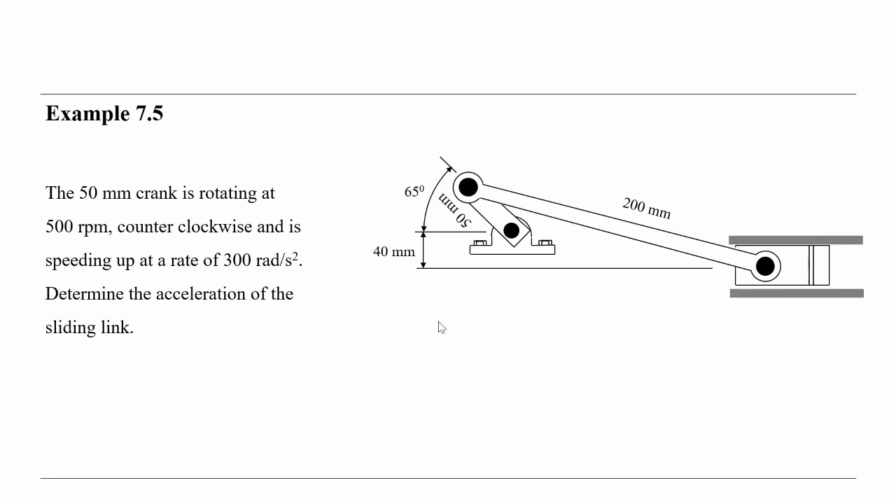Okay, so we discussed in our last lesson the acceleration for the crank slider mechanism, or slider crank mechanism. Now today we will discuss the acceleration for the general 4-bar mechanism.

As you remember, we discussed in our previous lessons the velocity, and we discussed the relative velocity. How can we calculate the relative velocity if we know VA, for example? Then we can calculate VB. VB is equal to VA plus VBA, V relative to A. So we think in the same direction to calculate the acceleration.

You see here the vector polygon for the acceleration, and how we can build or create such a vector polygon for the acceleration, and what type of acceleration we have for the mechanism, and for the 4-bar mechanism. So we will talk about the relative acceleration method, which dictates the creation of the vector polygons, and vector calculations can be used to analytically solve the problems.

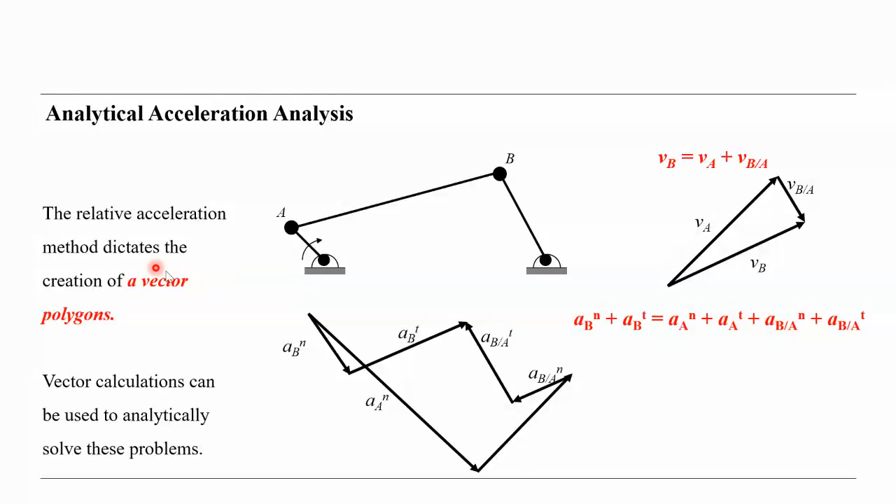So I have to write A0 here. This is A0, and this is B0 here. Let's write B here.

We know the motion of A0A, and there's only the normal component of the acceleration, and it is in the direction from A to A0. We draw a parallel from this, then to scale we can mark the magnitude of the normal component, regarding BA normal, BA tangent, B tangent and B normal.

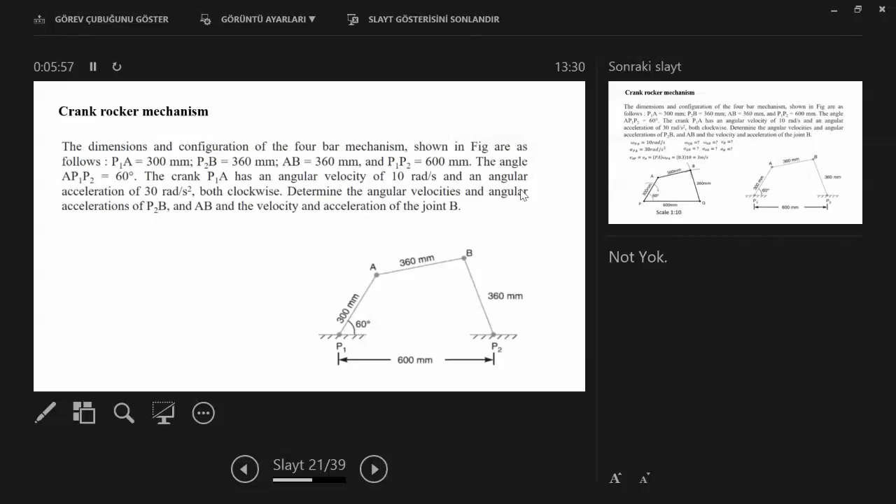The crank P1A has an angular velocity of 10 radians per second, and an angular acceleration of 30 radians per second squared, both clockwise. So determine the angular velocity and angular acceleration of P2B and AB, and the velocity and acceleration of joint B. Let's see what we have.

First of all, we have to draw the mechanism according to the givens. The givens are omega PA, the angular velocity, angular acceleration, and we are looking for omega QB, and omega AB, alpha AB, VB, and alpha B.

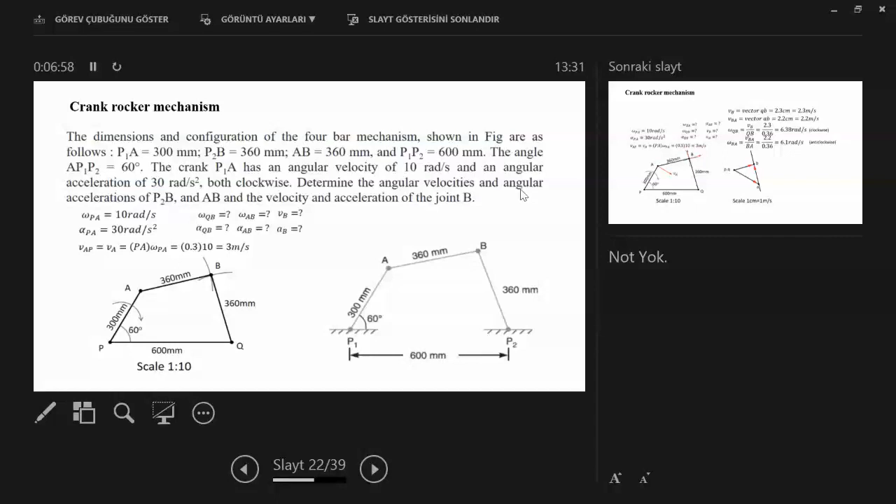So what can we do first? First of all, we have to calculate the velocity, because without velocity, we cannot calculate the acceleration. So the velocity is the first thing.

So we use a scale, 1 to 10, for the position of the mechanism, and we draw the mechanism. Then we know this acceleration and angular acceleration and the velocity of link A, or PA. So then we can calculate VBA.

Using the vector polygon, we know the velocity with PA, it is already given here. Because the angular velocity times its length gives us the velocity of the point, as a total velocity of point A, and this is the direction and the magnitude.

We can transfer here parallel to this point, so then we know the direction. We know the direction of the velocity of point B. It must be perpendicular to that, so therefore it is perpendicular.

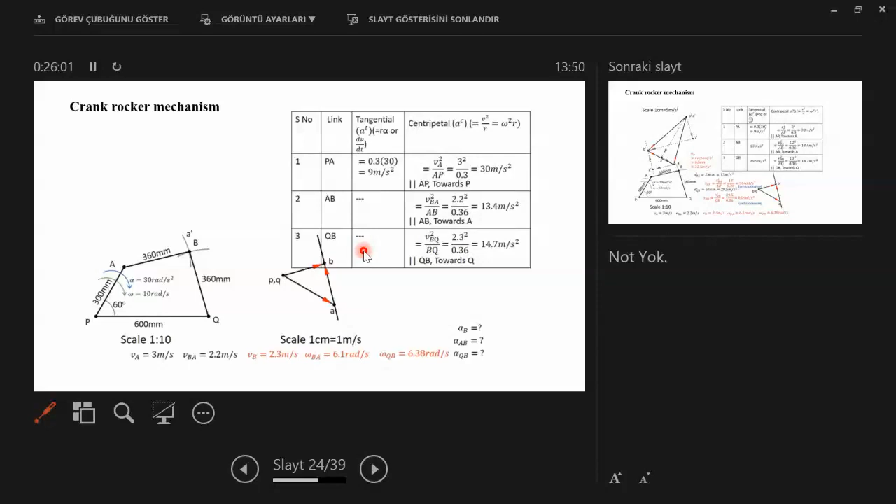But for links 2 and 3, using the velocity values we calculated before, we can calculate the normal components of the acceleration, but we cannot calculate the magnitude of the tangential acceleration for links 2 and 3. We know only the directions, and therefore we need the vector polygon by drawing to find out. All right, I get it. Thank you, Professor.

So this is, very graphically, how we can calculate the velocity for a general mechanism. As I mentioned, this is one method, one of some of the methods. The other one is the analytical way, the algebraic way. I will show you, and in the book I give the name, all these equations you can find there.

There are also other possibilities. If you calculate the coordinates - you learn this in the dynamics part - if you can calculate the coordinates of this point, that means xb and yb, the first time derivative is the velocity, and the second time derivative is the acceleration. It's also one way.

But if you design something using design software like Inventor or SolidWorks and so on, it is also very easy to draft such a polygon and find out the values. Repeat that, I didn't understand. What do you mean? I mean, if you make a design using design software like SolidWorks or Inventor, you can using the graphic facilities easily calculate for a certain position of the mechanism.

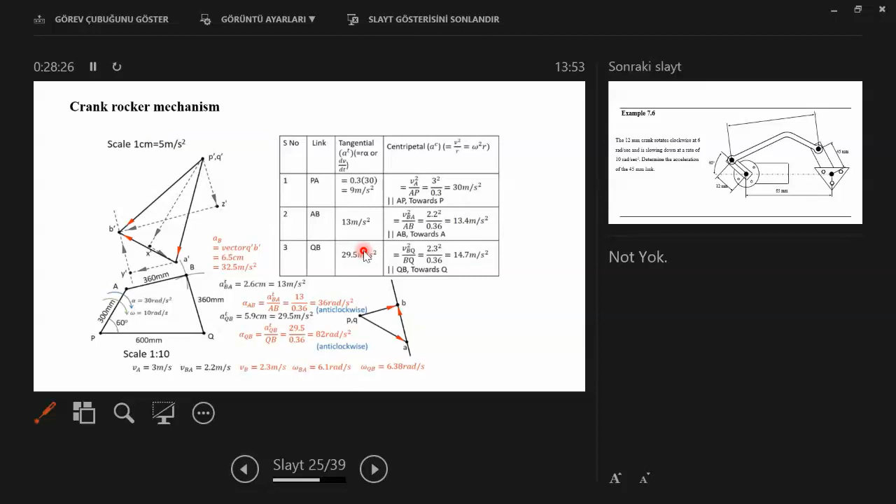You can calculate the velocity and acceleration, and to define a scale and to calculate it is very easy if you use such a software. The facilities given by the software are actually fascinating today. So, this is another homework - you have to work on that.

So then let's... you didn't do it? This is homework 7.6.

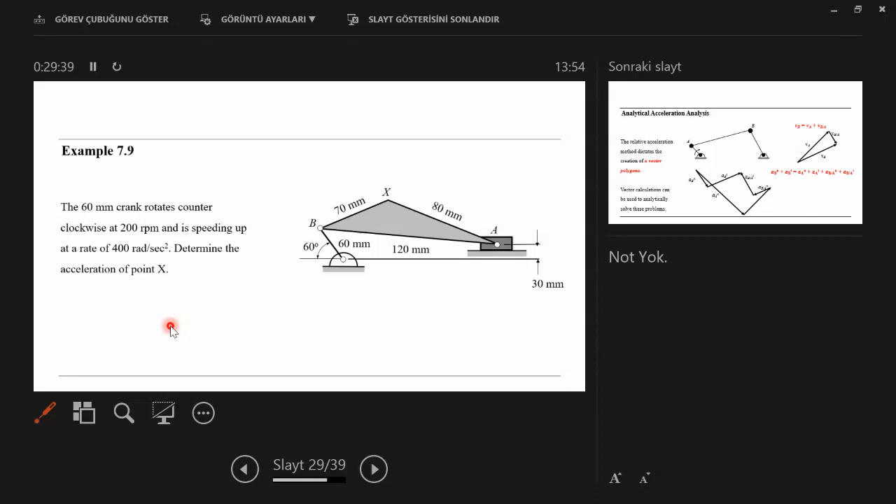Yes, I want to see it. Send it, okay. When is the deadline for the homework? Before the final exam.

Can you show the question again, please, just to take a photo of it? 7.6, okay, this one. Yes, just a moment. This length is not shown here. Sorry.

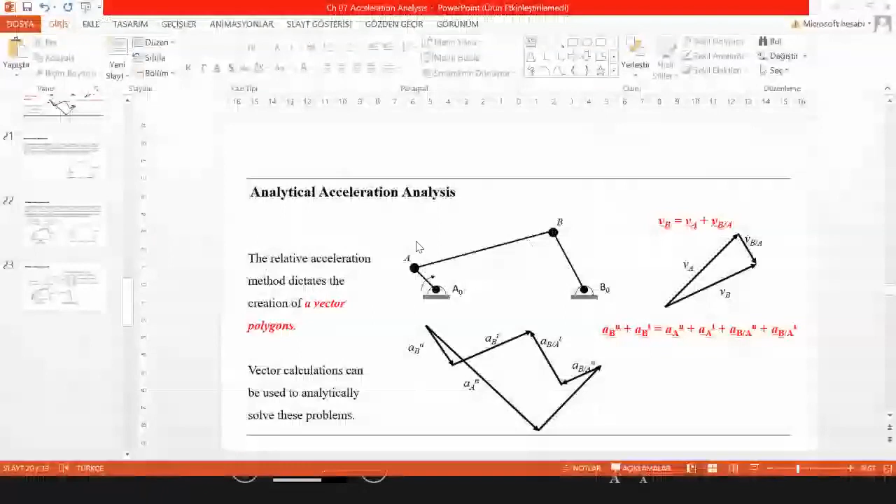So let's see, 250, it could be 250. Let's look.

Professor, is it possible to have all the homework questions in one PDF, like the previous homework? Because we have many questions in different recordings and it's hard to catch them up. You mean make one PDF with all homework questions? I did it at the beginning, but this is the last homework. This is the only homework, it's not more. But wasn't there another question from the previous lecture? I think there was another one. It's already finished, I will not go back again.

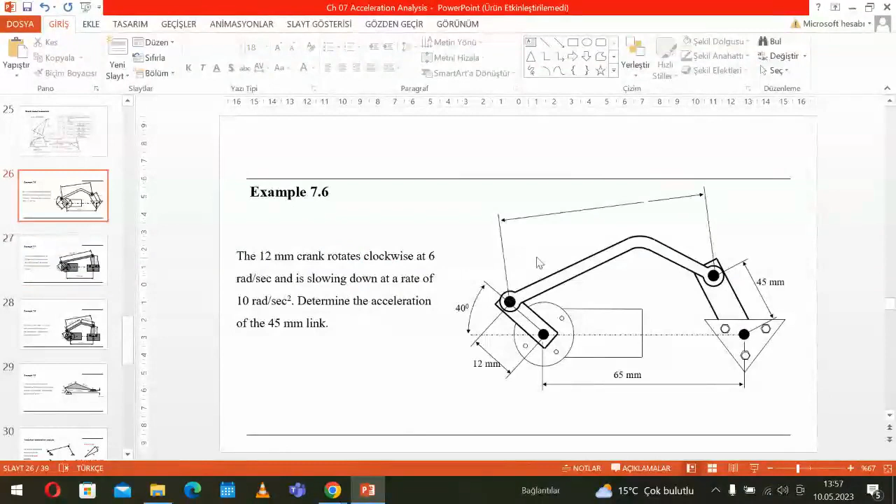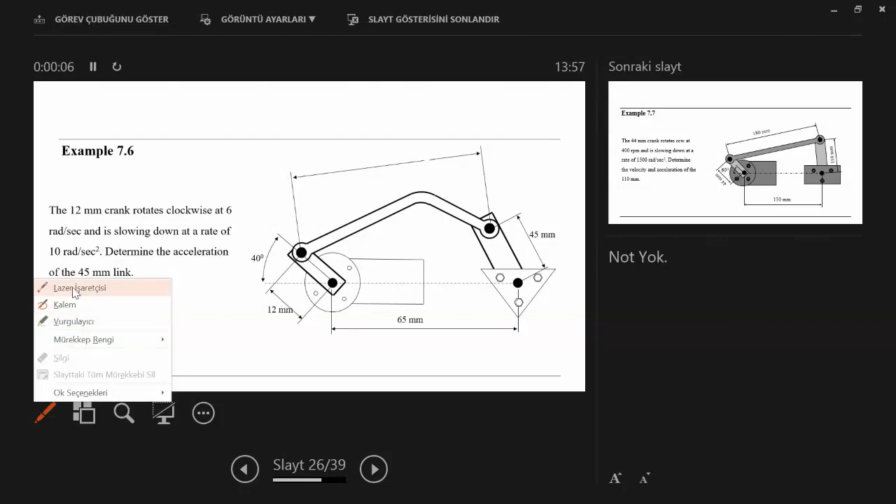Please do this homework, not that one, because the length is not defined here. I will check it. This one, you have all the dimensions. The crank rotates counterclockwise at 400 and is slowing down at a certain rate. Determine the velocity and the acceleration of the link.

Okay, so... before the final exam, yes.

Professor, can we bring the answer sheet, like a formula sheet, to the final exam? Send it by email, no, for the final exam, can we bring a formula sheet? Not a formula sheet, there's not too much formula. This is very simple, it's like kinematics, not machine design, not like the other lessons. Even mechatronics components? What do you want to bring from mechatronic components?

You didn't read it? No, I just remember it. No.

But there are equations for the crank slider and the crank rocker, big and long equations, how are we going to memorize those? The equation, the analytic way - okay, you can have some equations there, handwritten. I allow the equations, you can bring the equations, but handwritten, and no solutions. If I see any solution, I will stop your exam, all of them.

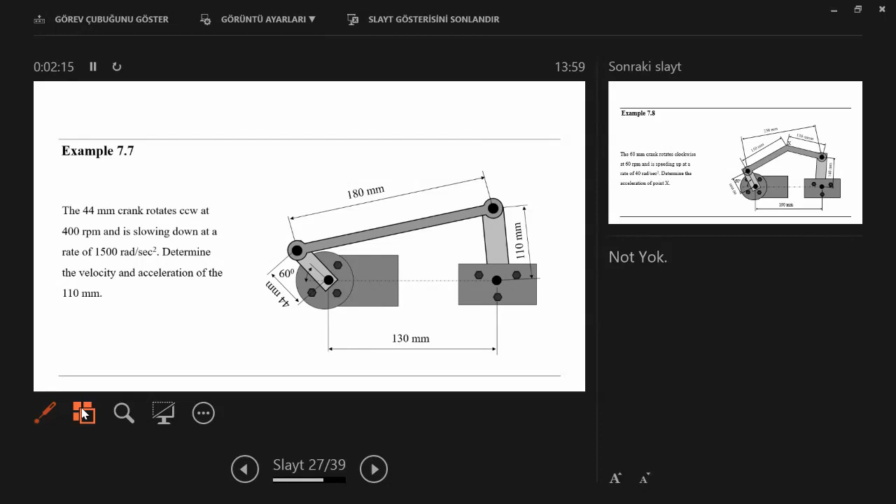But you must also know how you can calculate the acceleration and velocity using the graphical method. So how can we make the graphical method by hand, without a system, without a computer?

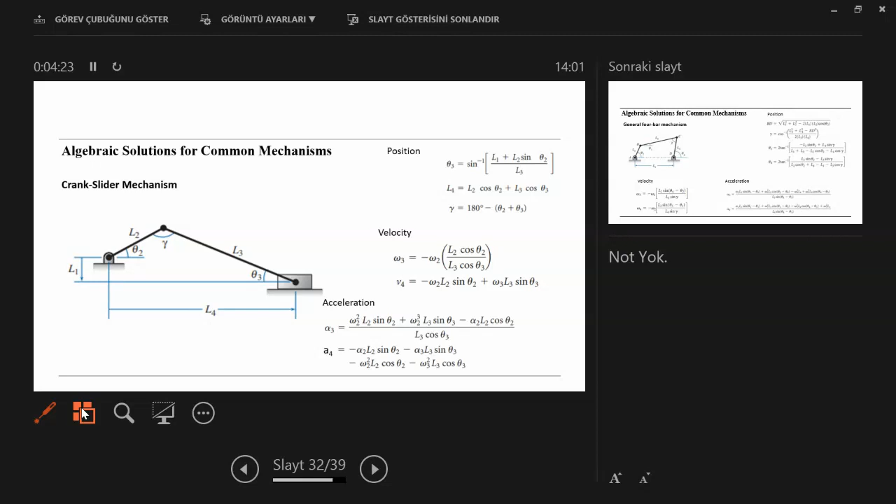And the second famous mechanism is our general four-bar mechanism, and also the algebraic solution for acceleration. I have here, and in your book some of them exist. I will calculate the position, velocity, and acceleration. Position, first time derivative is velocity, second time derivative is acceleration.

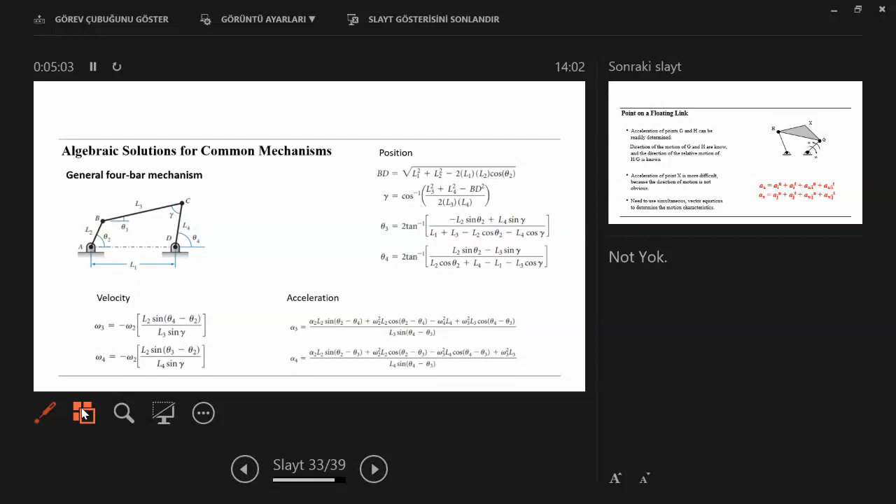Okay, so then a point on floating link. It could happen, in applications, that you should calculate the velocity or acceleration of any point on the coupler.

Because you know the coupler is the most difficult part in a four-bar mechanism. The coupler undergoes planar motion, that means translation and rotation together. But the crank, let's say this one, is rotating in simple motion, and this one is also simple motion - a circular motion about this point, and the motion of D is also circular about this point here. But the coupler is different.

So therefore, for any point on the coupler, how can we calculate the velocity and acceleration? This is the general equations we know from the relative acceleration or velocity method.

And we can also, if we know the velocity, I will get the acceleration. AX is equal, if you calculate AX, and if we know AE normal plus AH normal plus AH tangential plus AX relative to H normal plus AX relative to H tangential. So one of them you have to know, and the other you can calculate using the relative motion equations.

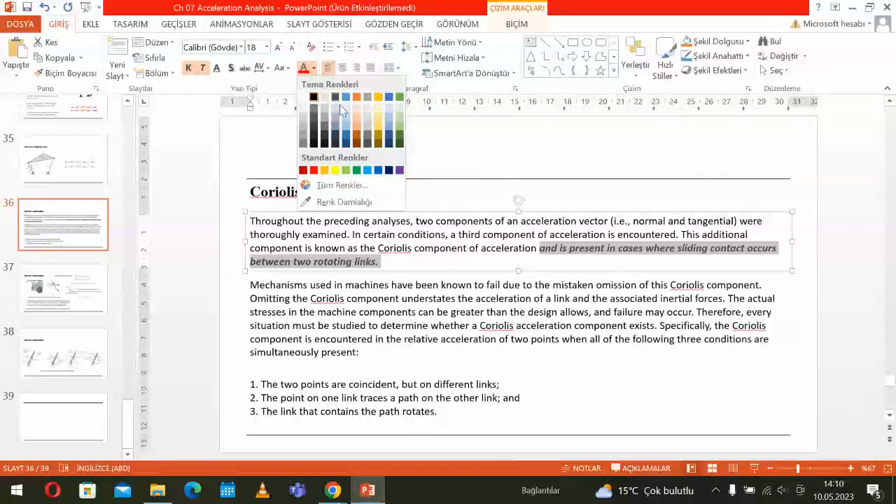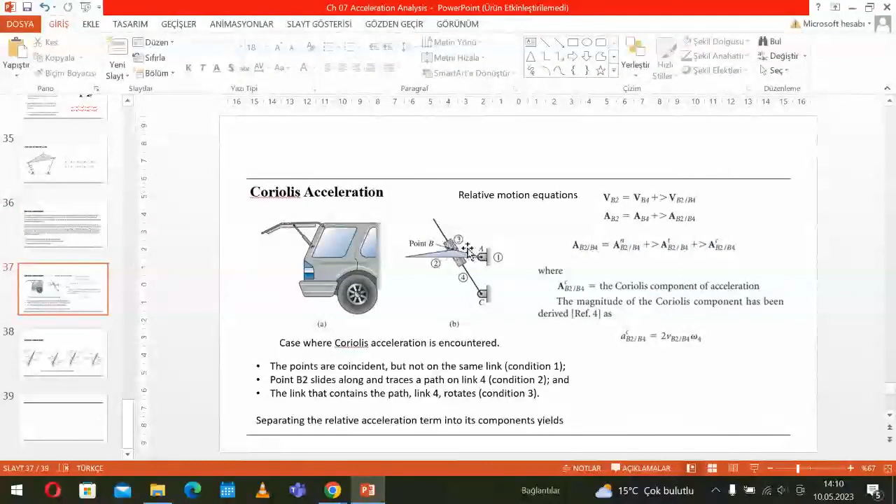examined, examined, mistaken omission,

Hojam, I'm sorry to interrupt you, but can I ask you a question?

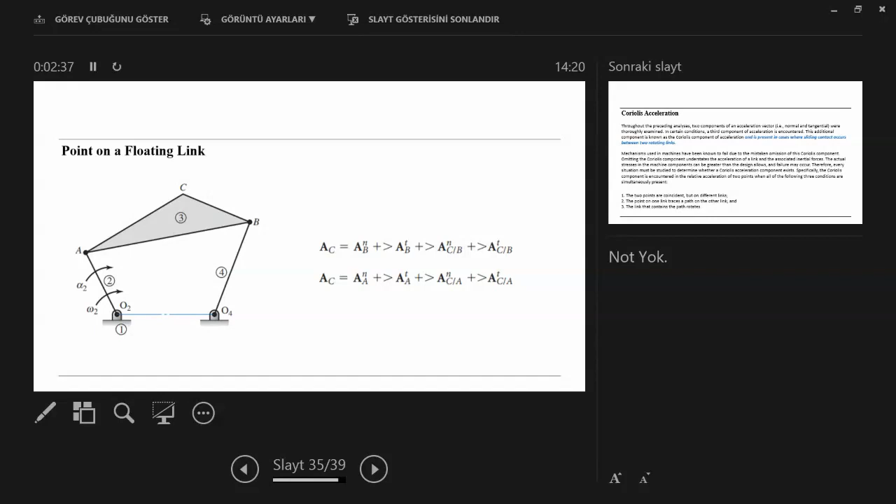So we can start, huh? The next part of this lesson regards the acceleration, the Coriolis acceleration.

Coriolis acceleration has been invented later, quite later. Technical calculations regarding acceleration made certain mistakes before, because scientists didn't know about Coriolis acceleration. Some scientist, I guess from France, invented this part of the acceleration and tried to predict it.

So, Coriolis acceleration is present in a case when sliding contact occurs between two rotating links. Let's say we have two rotating parts, one rotating here, the other one rotating here, and they have a sliding.

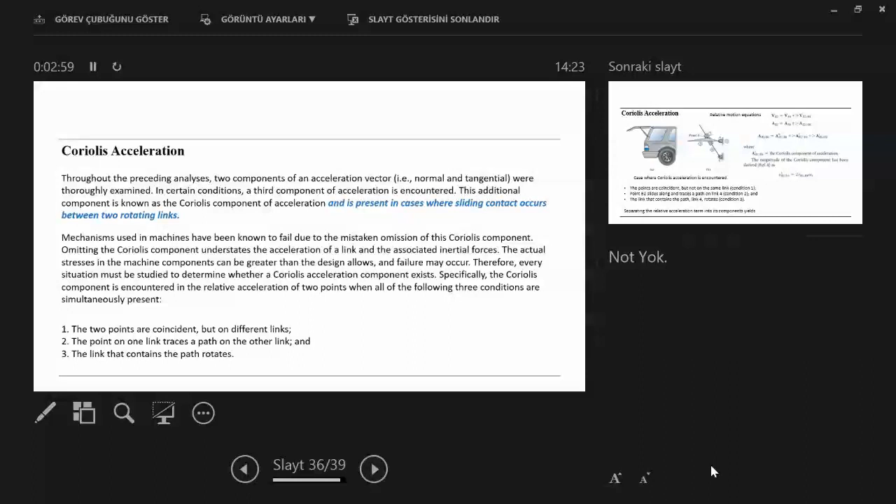And the points on one link create a path on the other link, and the link that contains the path rotates. There's a nice example for that from a car - each car has a door, and the opening and closing of the door has such a mechanism.

And this is like this actually. In this case, we have Coriolis acceleration.

From the relative velocity equations and relative acceleration equations, we get the Coriolis acceleration, B2 to B4, times omega 4. Omega 4 is the angular acceleration, angular velocity of link 4. So we can calculate exactly.

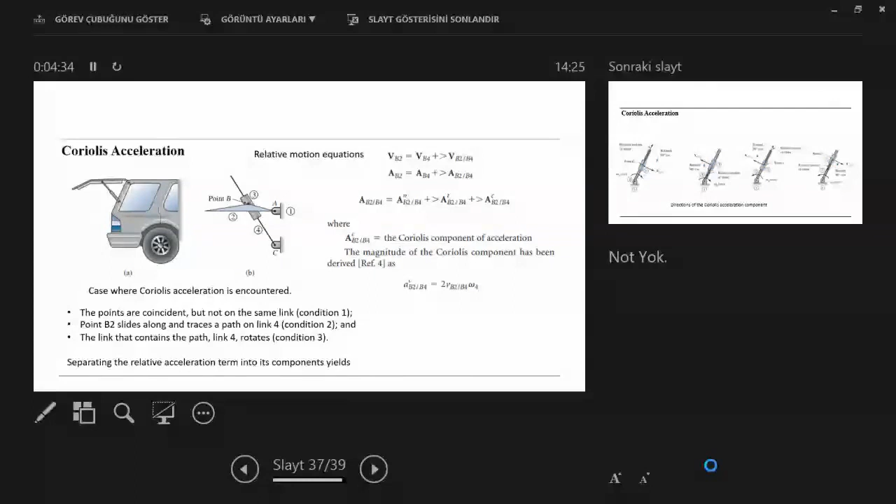This is the equation, so the points are coincident but not on the same link. Point B2 slides along and traces a path on link 4, and the link that contains the path, link 4, rotates. Separating the relative acceleration terms into its components yields this, as we can see in this example.

We will not make an example here, but there is an example you can work on. If you cannot calculate the acceleration correctly, that means you are also not able to calculate the forces coming from the acceleration, the inertia forces.

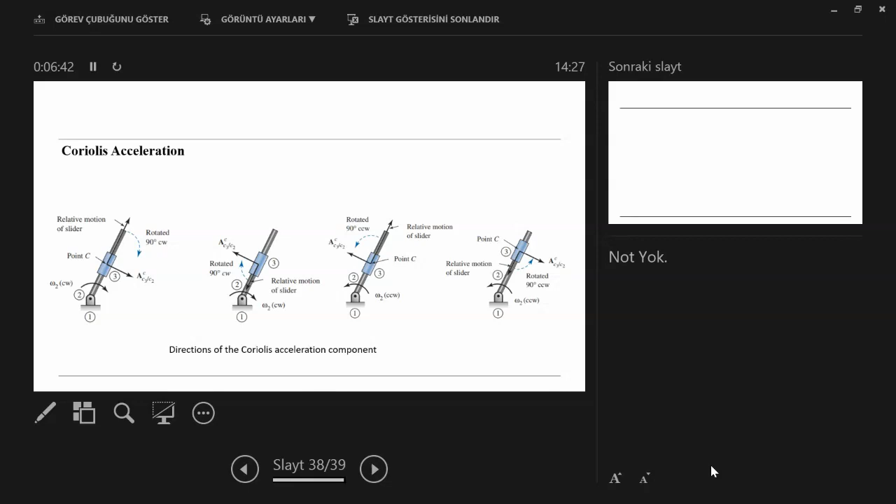Okay, so we finished the part on acceleration. Now, the cam mechanism.

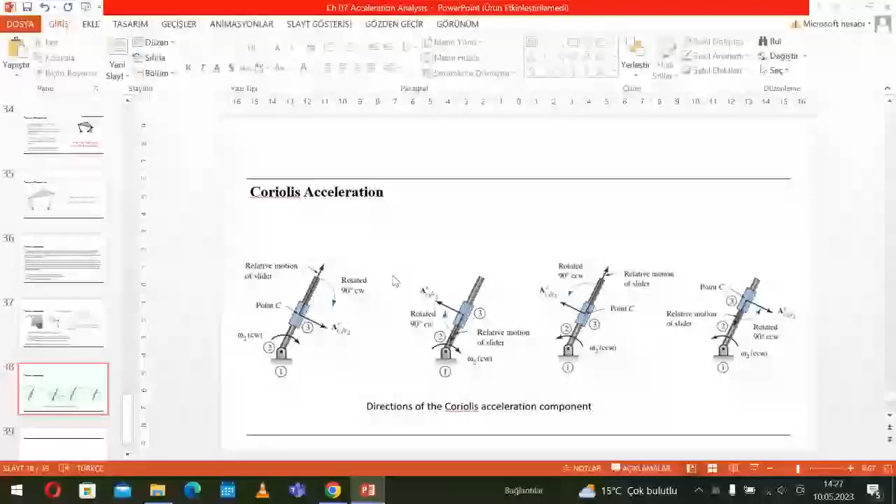So the cam mechanism was shown here. Let's see whether we can find it.

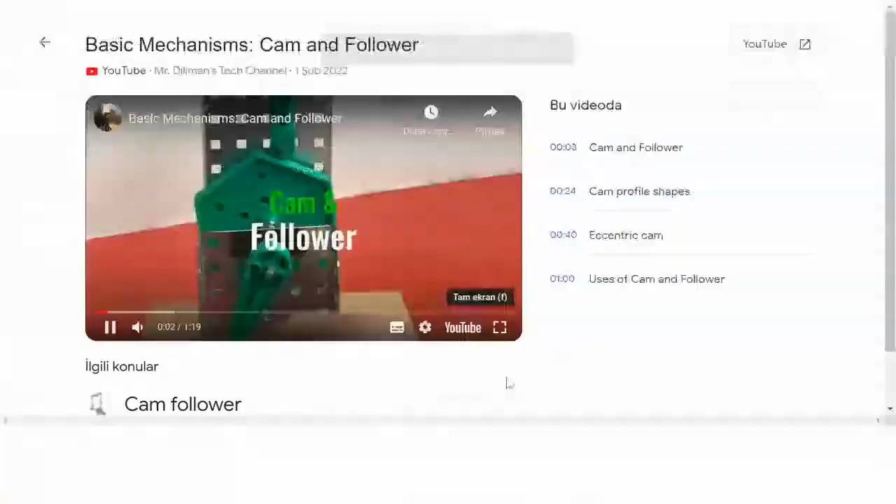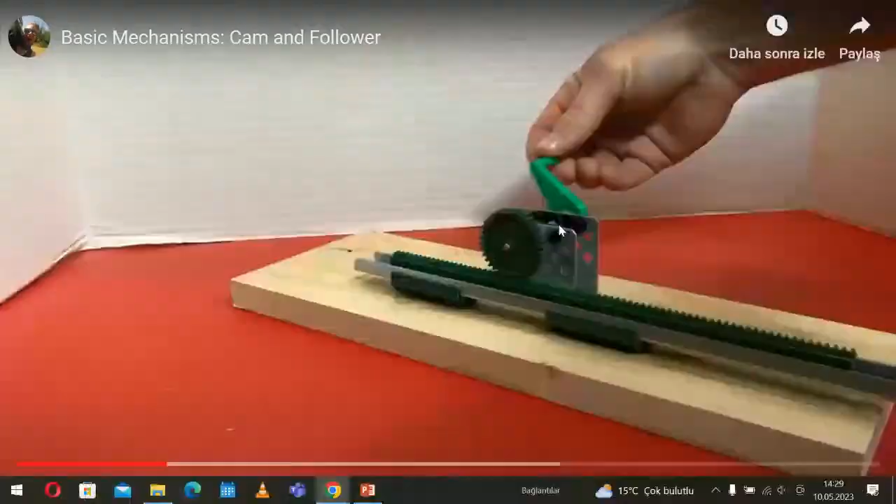A cam and follower is a mechanism used to turn rotary motion into reciprocating or back and forth motion. Reciprocating motion is different from linear motion because in a linear mechanism, you would have to reverse the direction of the input to get a different direction of travel at the output, while a reciprocating action goes back and forth while the input turns continuously.

A cam is a wheel with an offset center. Cams can have different profile shapes that produce different motion paths in the follower. A snail cam produces a slow rise and a sharp drop. This kind of cam is not reversible in its direction.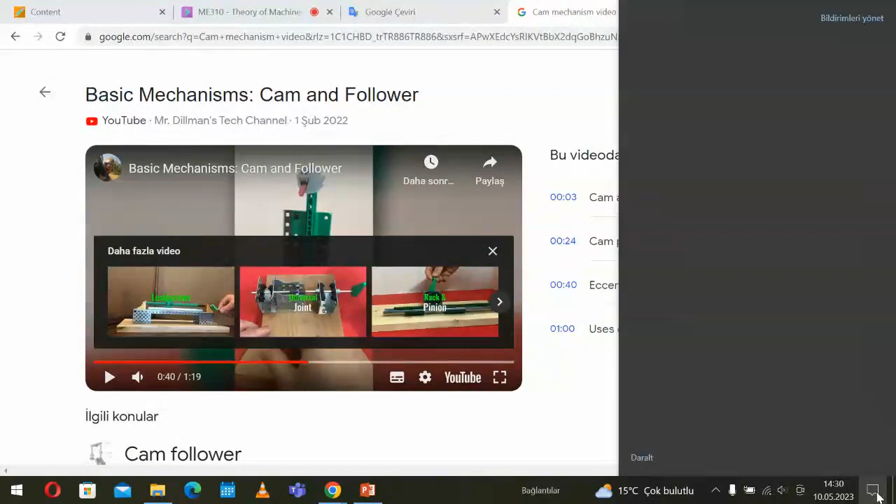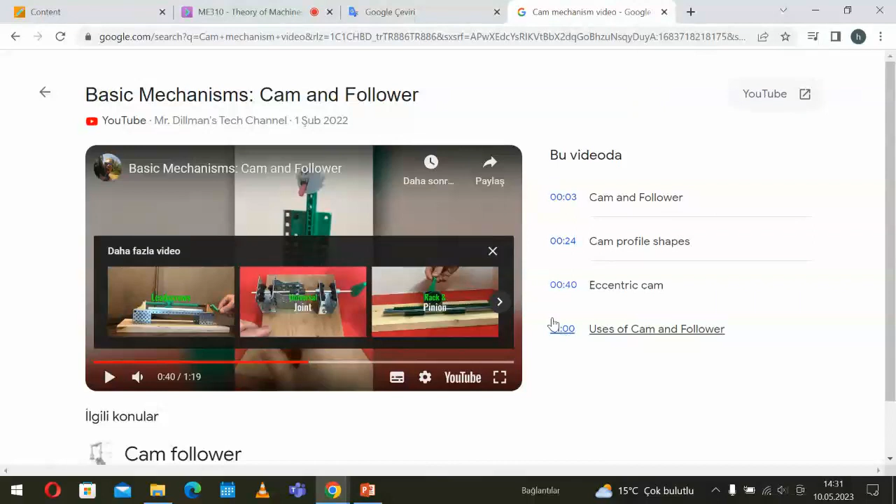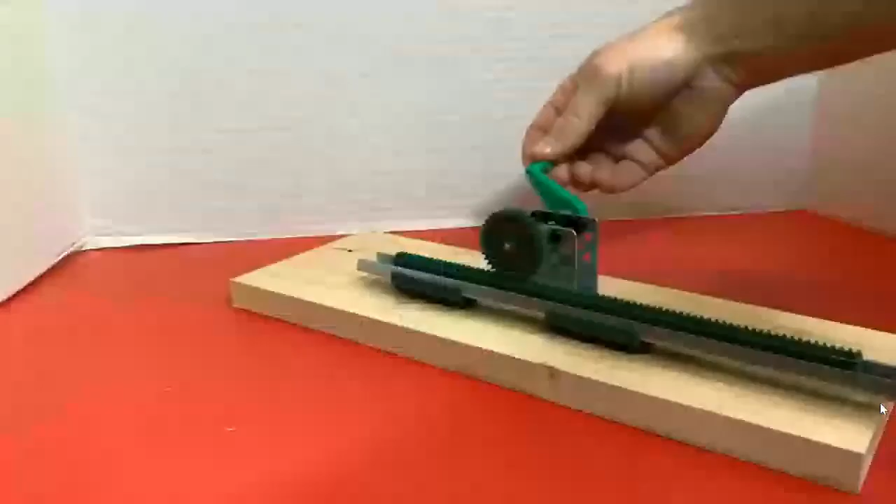A cam and follower is a mechanism used to turn rotary motion into reciprocating or back and forth motion. Reciprocating motion is different from linear motion because in a linear mechanism, you would have to reverse the direction of the input to get a different direction of travel at the output, while a reciprocating action goes back and forth while the input turns continuously.

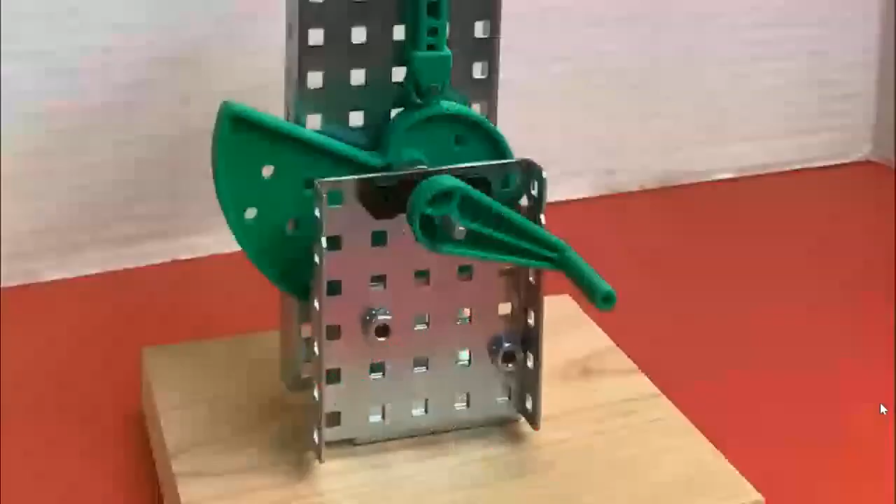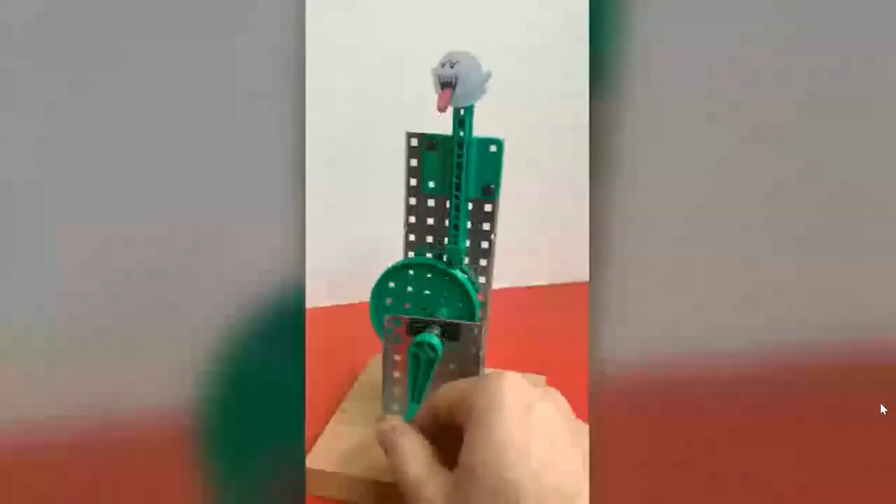A cam is a wheel with an offset center. Cams can have different profile shapes that produce different motion paths in the follower. A snail cam produces a slow rise and a sharp drop, and this kind of cam is not reversible in its direction. An eccentric cam produces a steady rise and fall in the output, like a sine wave. A pear cam produces a quick momentary rise and fall followed by a mostly stationary follower.

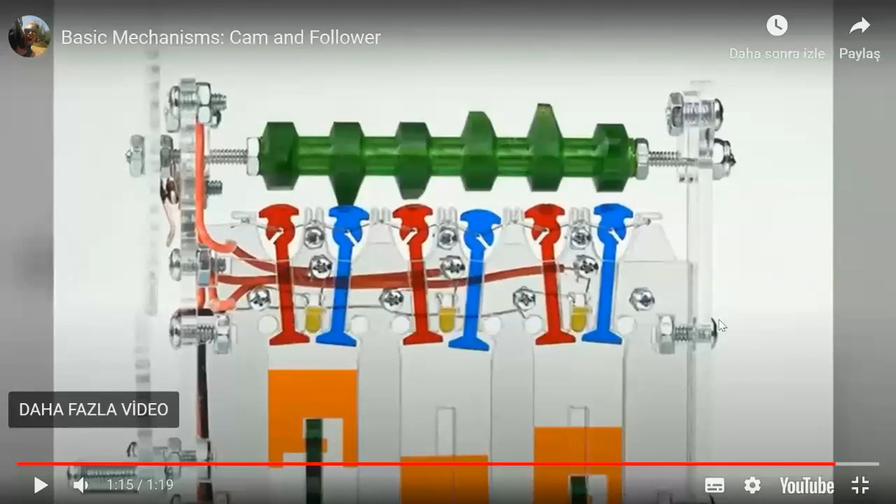So, in an internal combustion engine, we have a CAM mechanism to operate the valves, inlet and outlet valves. We use a CAM mechanism. So the CAM mechanism is also an important mechanism used in mechanical engineering.

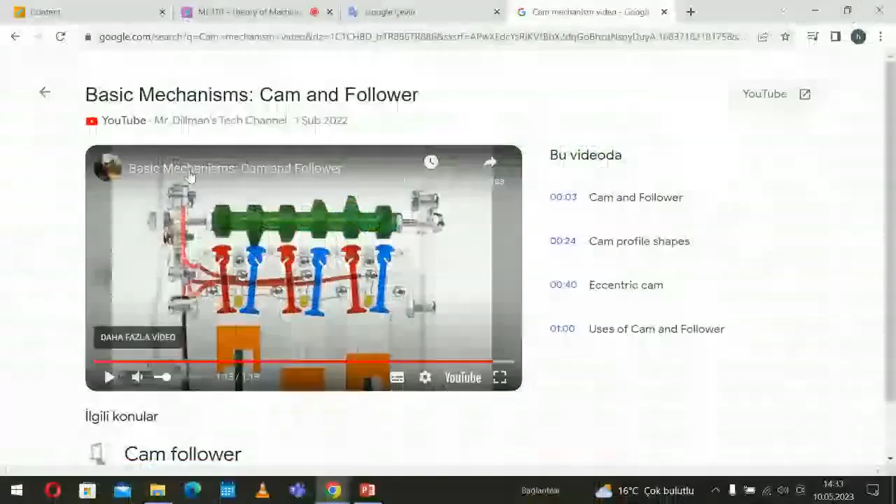So that I can show more, maybe here. Let's explain cam and follower. We know that in any engine, fuel is injected into the piston and combustion products are exhausted out from the piston by using valves. These valves are opened and closed with the help of a kinematic pair, cam and follower. The cam and follower are always in point or line contact with each other.

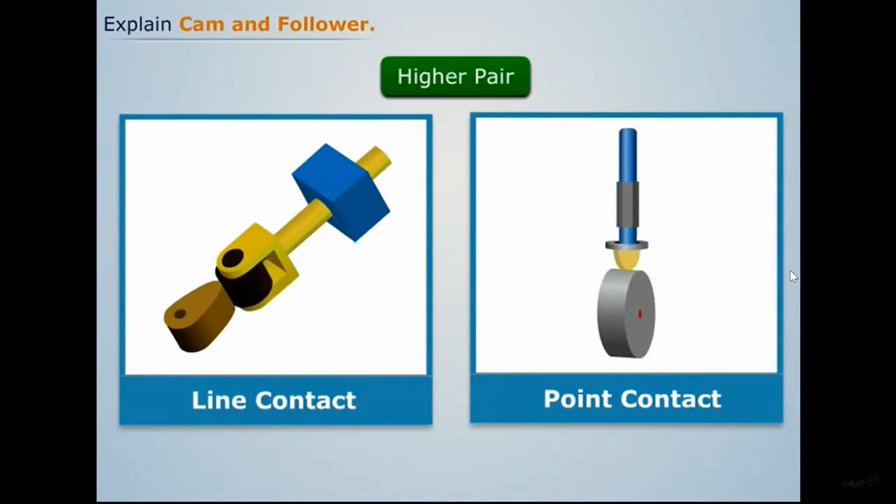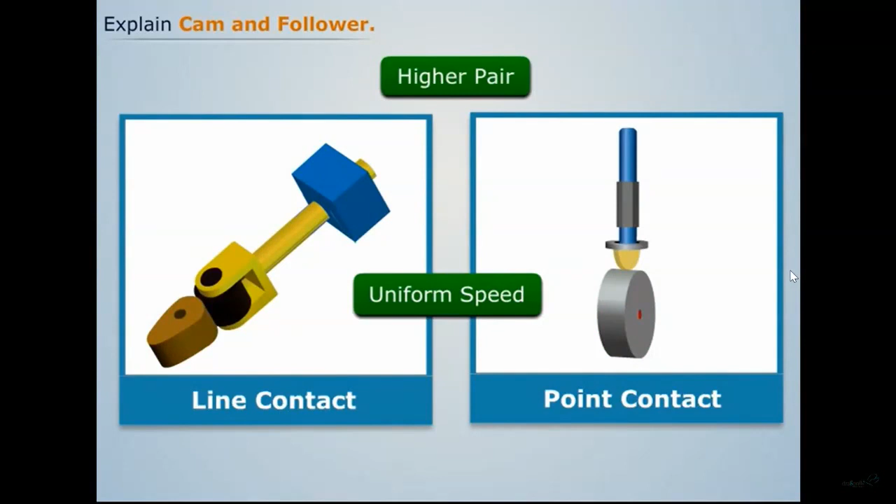So this kinematic pair is a higher pair. Cams are rotated at a uniform speed by a shaft, while motion of the follower is determined by the shape of the cam. Similar cam and follower pairs are used in sewing machines, feed mechanism of automatic lathes, etc.

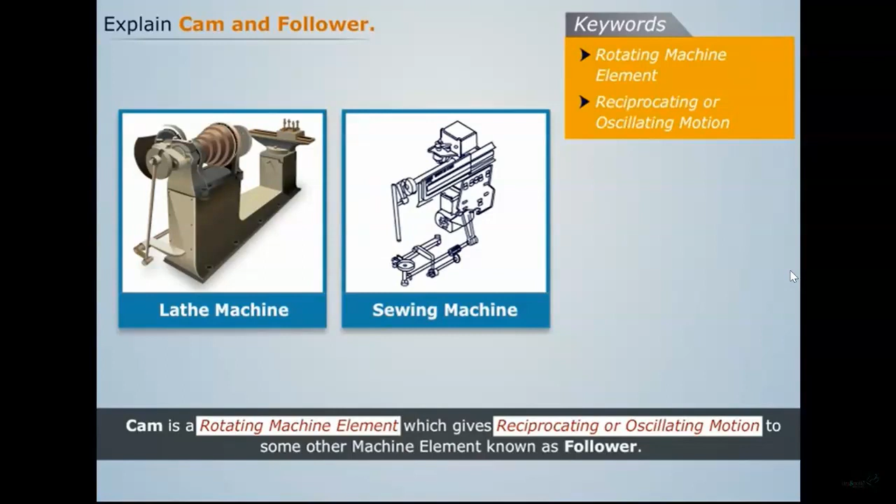Thus, cam is a rotating machine element which gives reciprocating or oscillating motion to some other machine element known as a follower. Cams can be broadly classified into two types: radial cams and cylindrical cams.

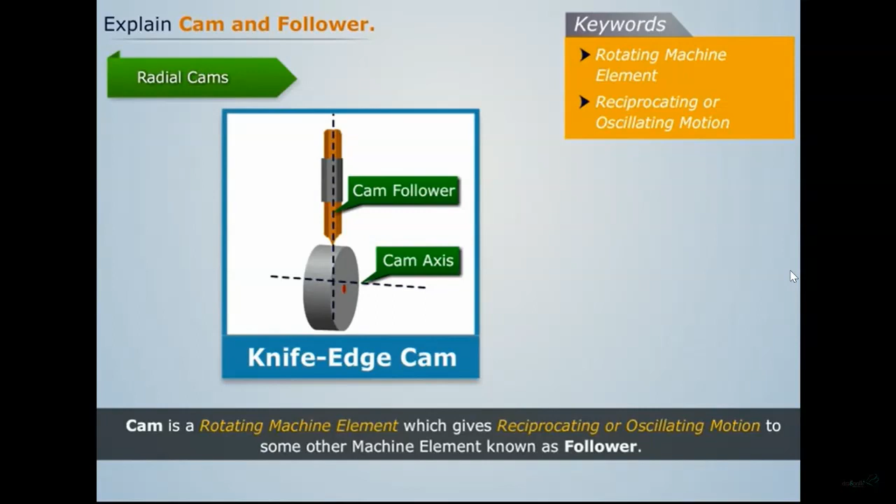In radial cams, the follower reciprocates or oscillates in a direction perpendicular to the cam axis, whereas in cylindrical cams, the follower reciprocates or oscillates about a groove in its cylindrical body in a direction parallel to the cam axis. Followers can be classified on the basis of three parameters: surface in contact, motion of the follower, and path of motion of the follower.

Based on the surface in contact, followers can be classified as knife edge follower, roller follower, flat-faced follower, and spherical face follower.

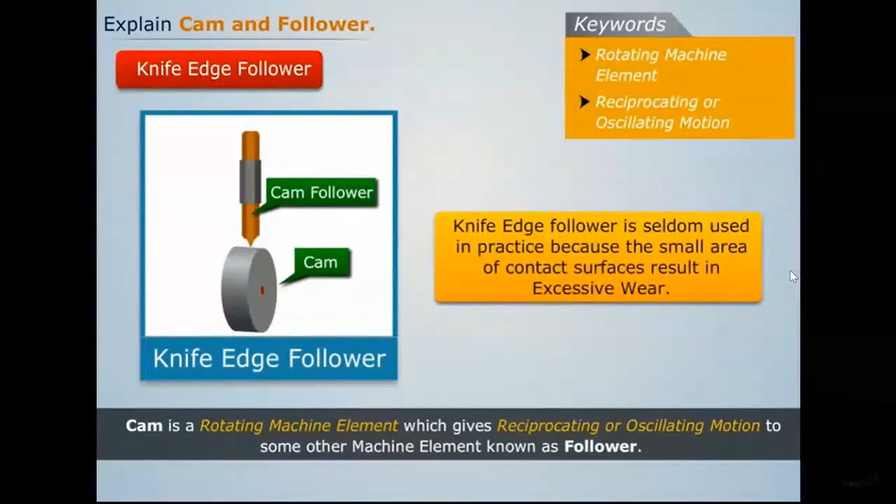When the contact end of the follower has a sharp knife edge, it is called a knife edge follower. It is seldom used in practice because the small area of contact surfaces results in excessive wear.

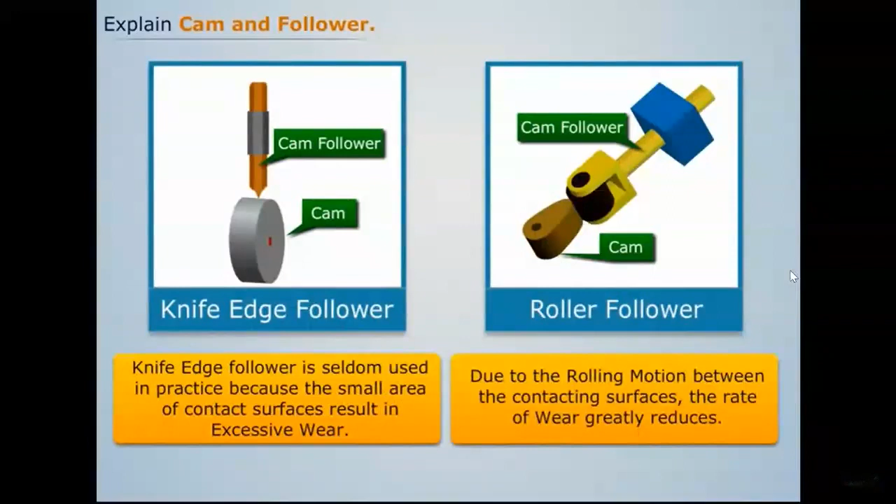When the contact end of the follower is a roller, it is called a roller follower. Here, due to the rolling motion between the contacting surfaces, the rate of wear greatly reduces. This type of follower is extensively used in oil and gas engines and aircraft engines.

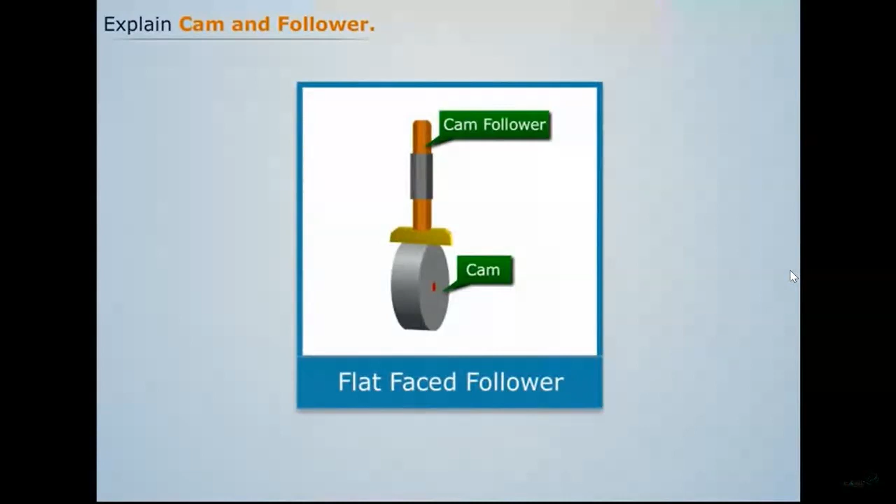When the contact end of the follower is a perfectly flat face, it is called a flat-faced follower. This type of follower is generally used in automobile engines.

When the contact end of the follower is spherical in shape, it is called a spherical-faced follower. This type of follower is used in automobile engines.

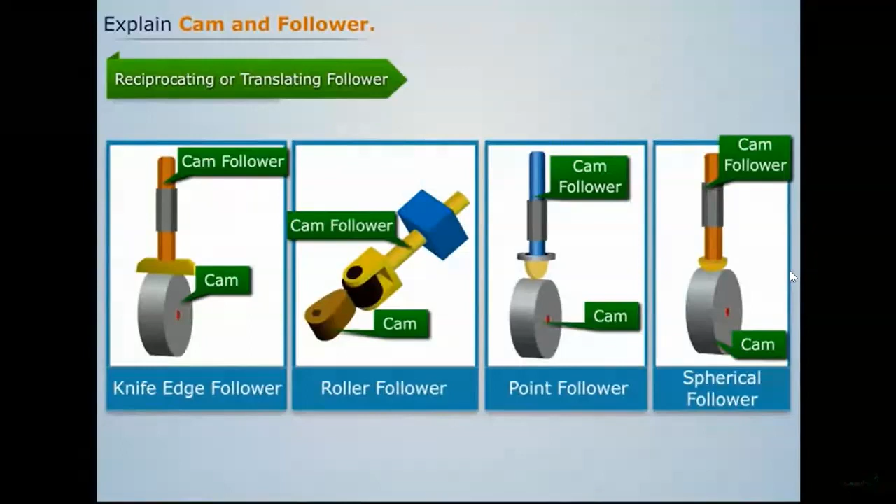Followers can also be classified based on the type of motion. When the follower reciprocates or translates in the guides due to uniform rotary motion of the cam, it is called a reciprocating or translating follower. When the follower oscillates in a predetermined direction due to the uniform rotary motion of the cam, it is called an oscillating or rotating follower.

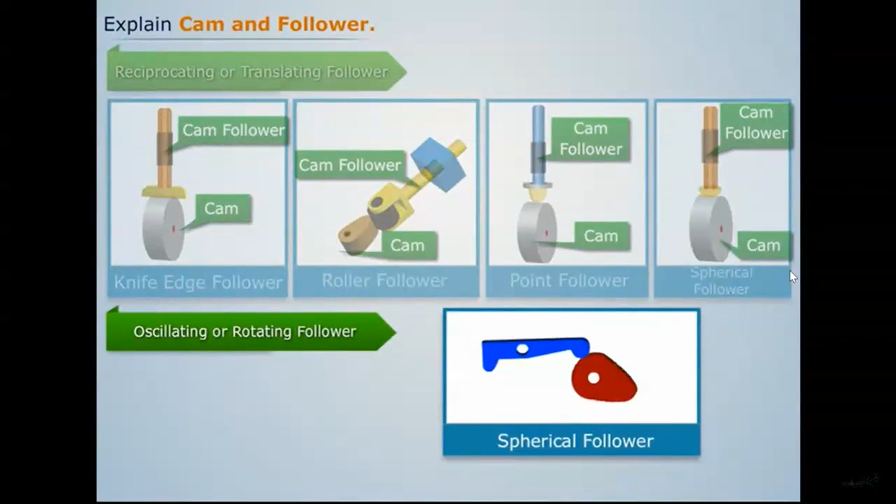Based on the path of motion of the follower, followers can be classified as radial follower and offset follower. When the path of motion of the follower is along an axis passing through the center of the cam, it is called a radial follower. When the path of motion of the follower is along an axis away from the center of the cam, it is called an offset follower.

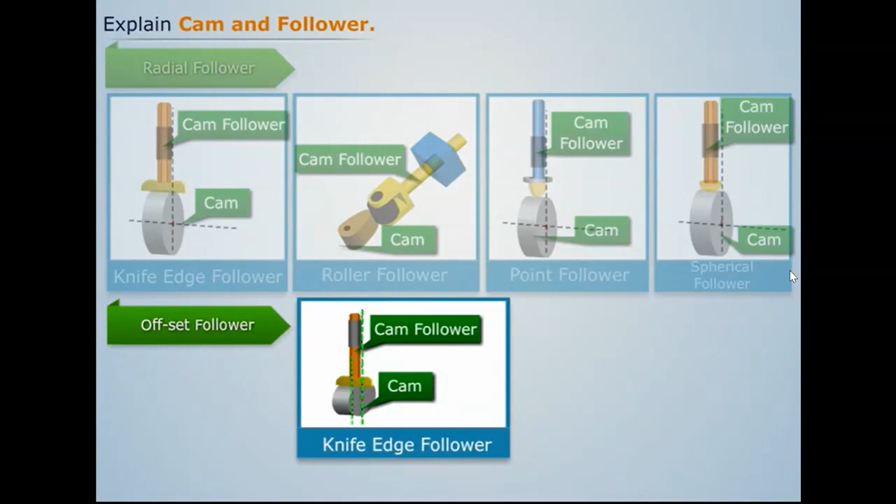Okay, so I hope you get some idea about the cam mechanism. So let's talk about... let me see that now. Okay.

So the cam mechanism: the input and output are similar to the linkage. We have rotational motion, rotary motion, and we have linear motion or reciprocating motion.

But the behavior of this reciprocating motion is: wait a little bit, then come down, wait a little bit, and go up, and so on. It's up and down, but the acceleration, velocity, and position are very interesting depending on the application.

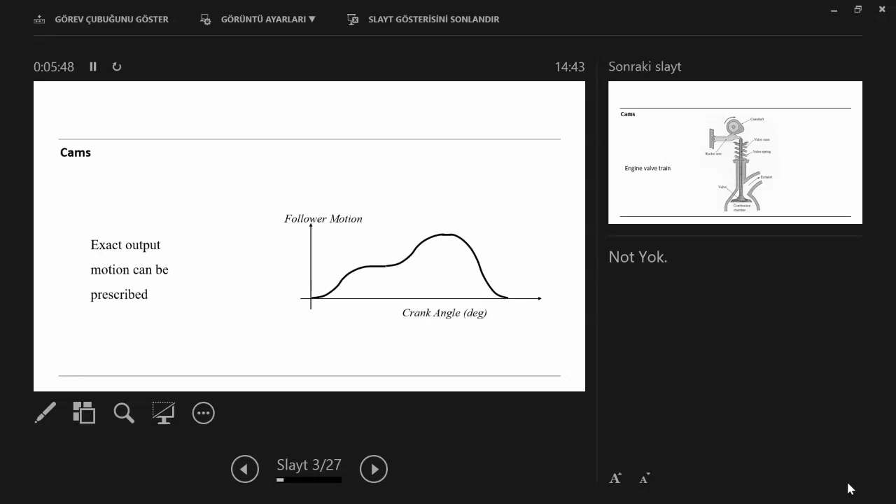And this is the output motion graphic, or transfer function. Transfer function means we transfer the input motion into the desired output motion.

You have seen also the engine valve control of the engine, like this. To open the valve, close the valve - no, it closes by the spring. The spring closes the valve, we open it using this cam mechanism. If it is turning like this, and this point meets this one, it pushes this slider down and opens the valve. And in this position, the spring pushes the slider up and closes the valve, and so on. That's an interesting application to open and close the valve.

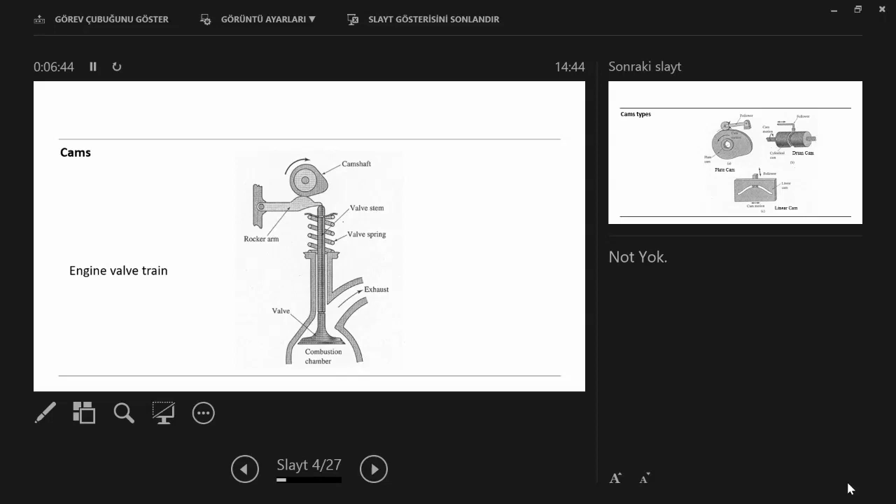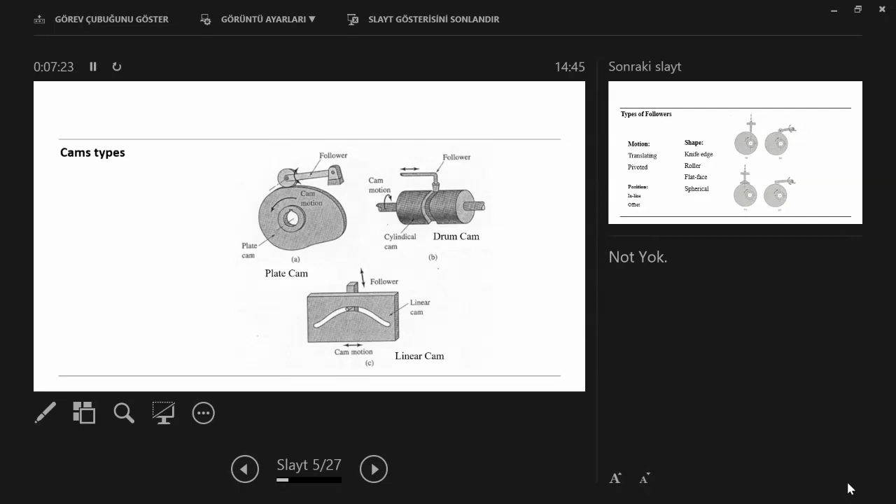These applications shown are from the internal combustion engine, but there are also other applications that use this type of mechanism. Here we have the mechanism where the follower is rotating, here the follower is oscillating, here it's making axial motion, this is radial motion, and so on - depending on which type of motion we need. So the problem is actually how can we design such a mechanism for a desired output motion.

Here you see it's translating, motion is translating, shape is knife edge - you already learned this - and pivoted and roller, like here you get pivoted and roller. And the position can be, let's say, flat, or can differ - inline or offset, or shape-wise: knife edge, roller, flat face, spherical, and so on.

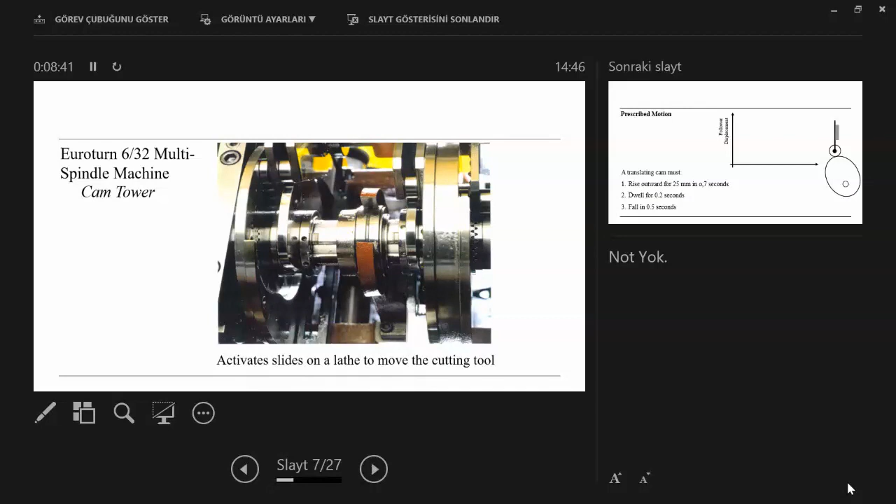And this is a picture from the application, you see the cam mechanism and the follower.

So we have to describe the motion at once. The translating cam must rise outward for 25 millimeters in 0.7 seconds.

Now we are going to define the output motion. The translating cam, let's say on the right side, moves outward 25 millimeters - that means go 25 millimeters in 0.7 seconds. Then dwell for 0.2 seconds, meaning stay there, and then fall completely down in 0.5 seconds. The complete cycle takes 1.4 seconds. In 1.4 seconds, the cam has to fulfill the full cycle - that's 360 degrees.

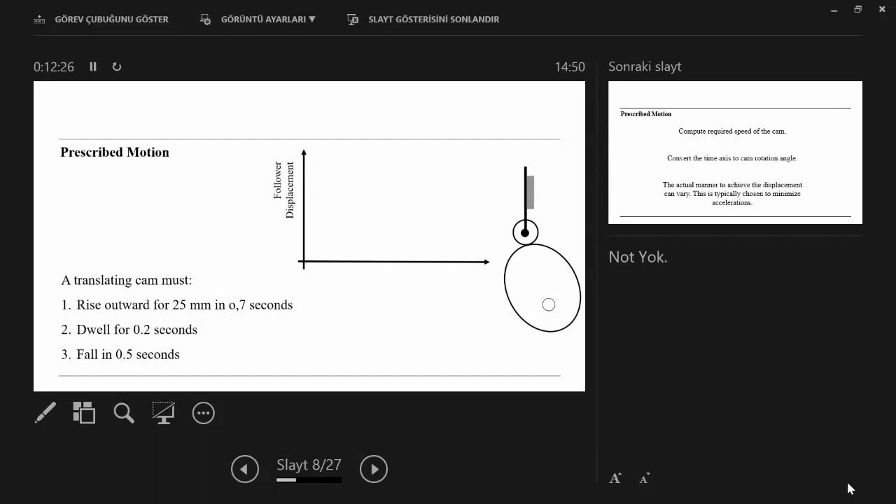Compute the required speed of the cam and convert the time axis to cam rotation angle. The actual manner to achieve this displacement can vary, and this is typically chosen to minimize acceleration.

We have seen in the video somebody turning the cam mechanism with a follower going up and down. The up and down motion depends on the shape of the cam, and we have to pay attention to the acceleration of the roller. The acceleration is not what we want.

If possible, zero acceleration. Acceleration means inertial forces - acceleration times mass. We get high inertial force from the acceleration, and it plays a big role for the machine. It is an unbalanced force, and it creates vibration and noise, which affects the material, connections, and all members of the machine.

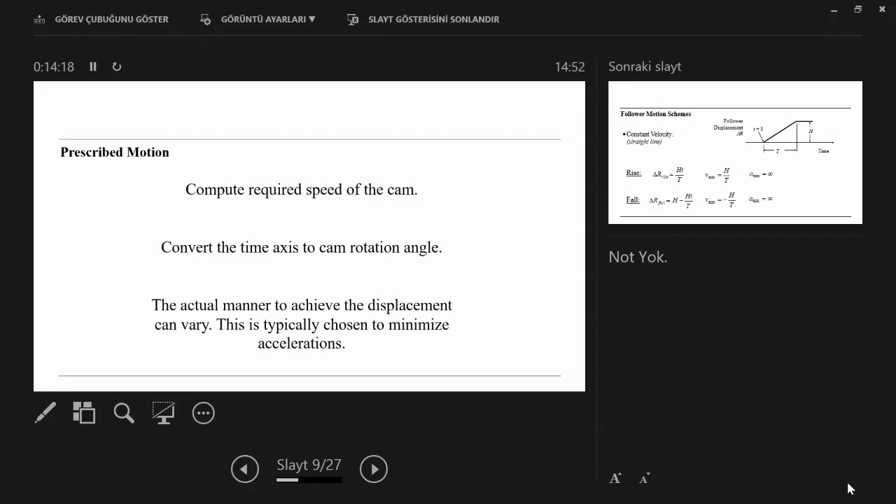So how can we define such a mechanism?

Constant velocity, let's say - constant velocity is for the static case. Constant velocity means a certain time, certain distance. Rise means delta R over the time, the distance over the time. V max is equal to h over t.

A max is the acceleration. For the fall, you can calculate fall length over the time, and then V max and A max you can calculate. So this is the formula we can use.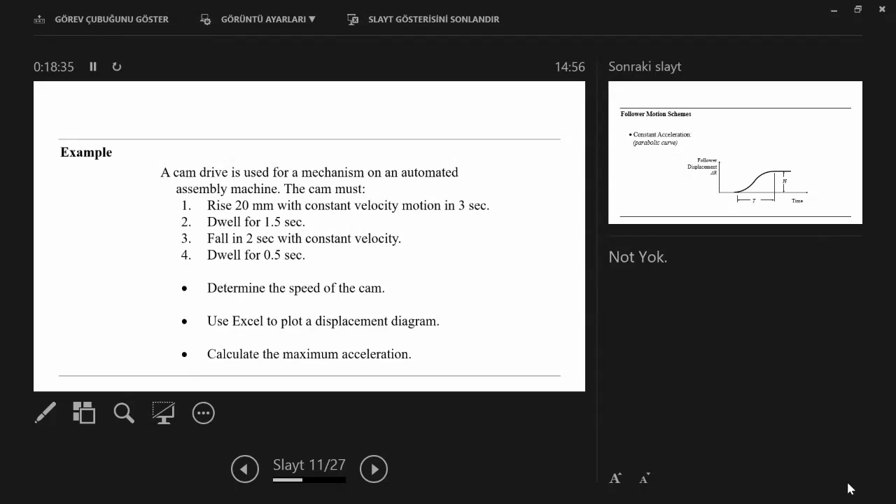So the follower motion is - for one cycle you have 360 degrees, and the cycle time is given already. Theta is given as 360 degrees, and time dt is already given, so you can calculate omega, and so we can continue.

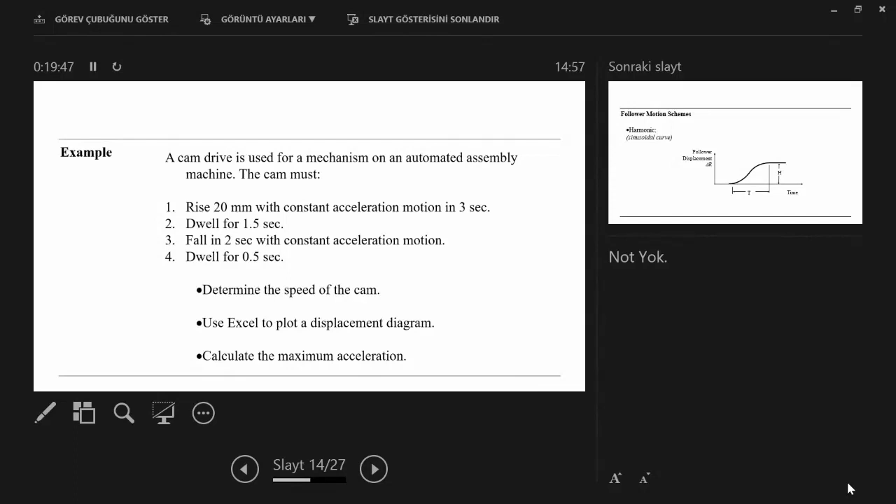So you are not responsible for this part of the lesson, the cam mechanism, but it is important - you have to study it for understanding. You will face it later on if you work in design; cam mechanisms are used. So in the book there are examples, you have to study that.

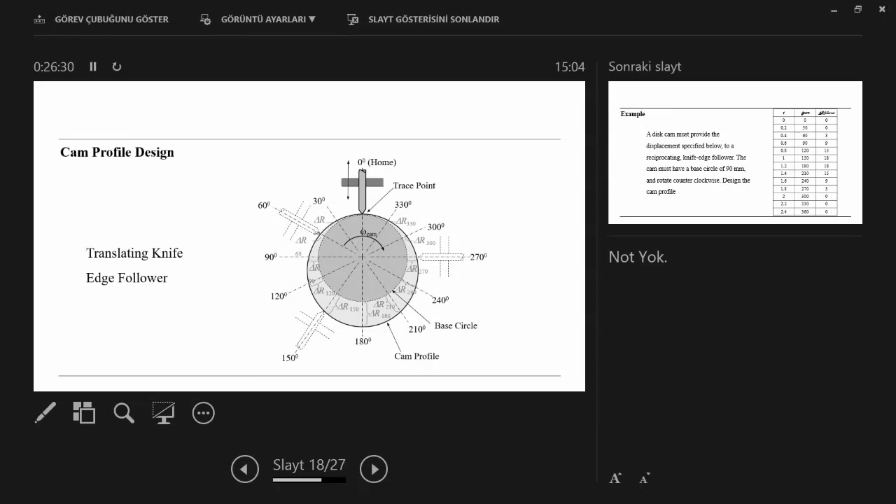Professor, yes. The cutoff time for the first homework is done. I had late registration, can I still do it?

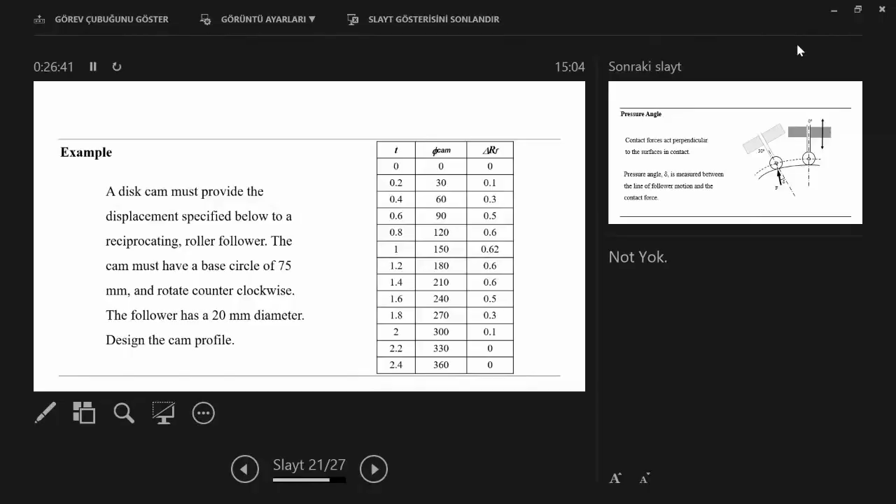Homework, moment, what? Do you want to see the homework? No, I mean I'm asking you, can I still do the very first homework you gave before midterm? What is it, can I still do it? I had late registration, the very first homework was done and submitted before I registered, that was after midterm. I'm asking you, can I still do it and send it to you?

You mean the first homework? Yes. Hocam, did you send it, the first homework?

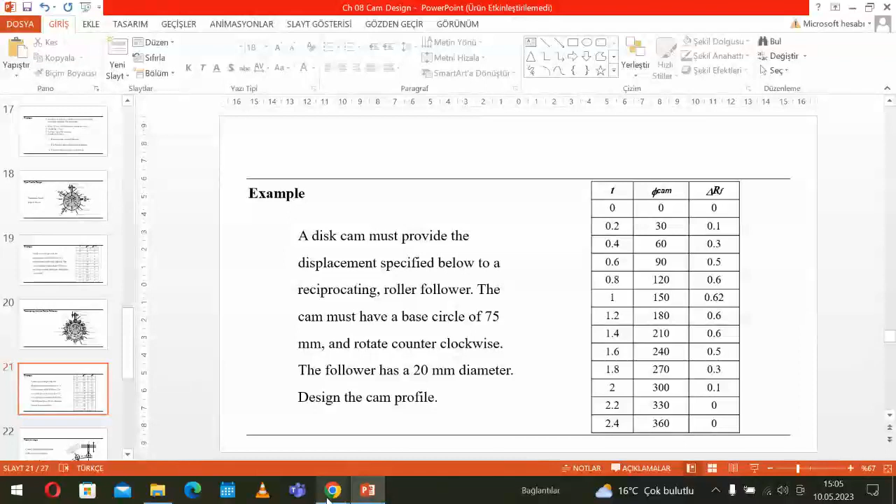I could, yes you can do it, yes you can do the first one. You mean the first homework? Yes, you can do it. Okay, thank you, you can do it much, but don't send it too late.

Don't send it too late, huh? So next week, latest next week, you have to send it. I'll send it this Friday. Okay, thank you very much, it's okay for me. You're welcome.